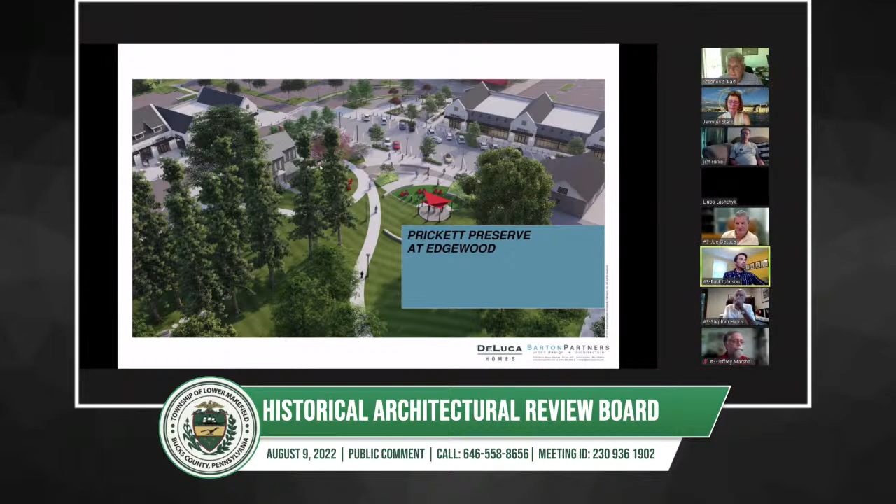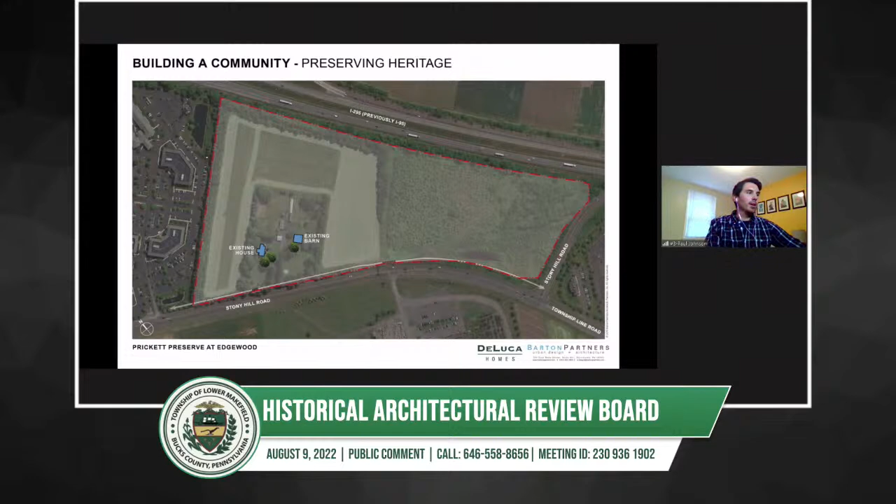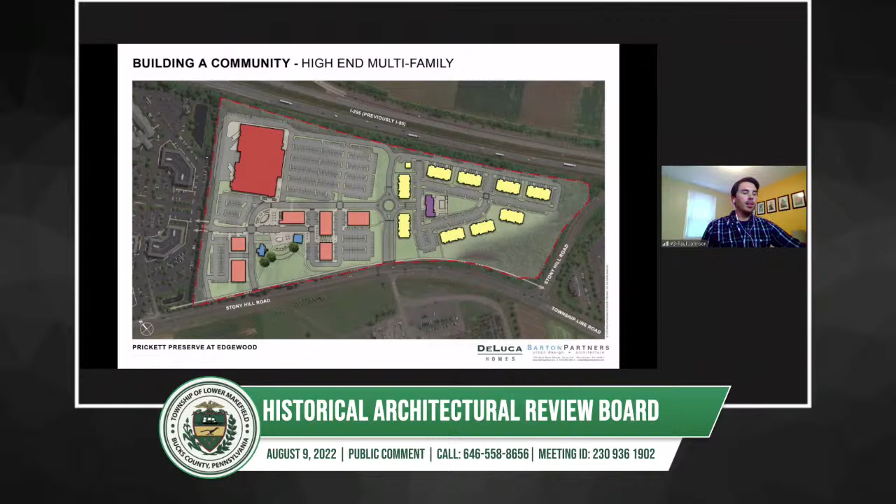This is an overview of the overall site for the Prickett Preserve area, highlighting the existing house and barn locations that will remain as part of the overall land development. The land development plan shows the existing house and barn surrounded by new proposed retail buildings, a grocer to plan north, and to plan east, 200 apartment units in 3-story walk-ups with a clubhouse. This is a rendered view of the complete land development plan.

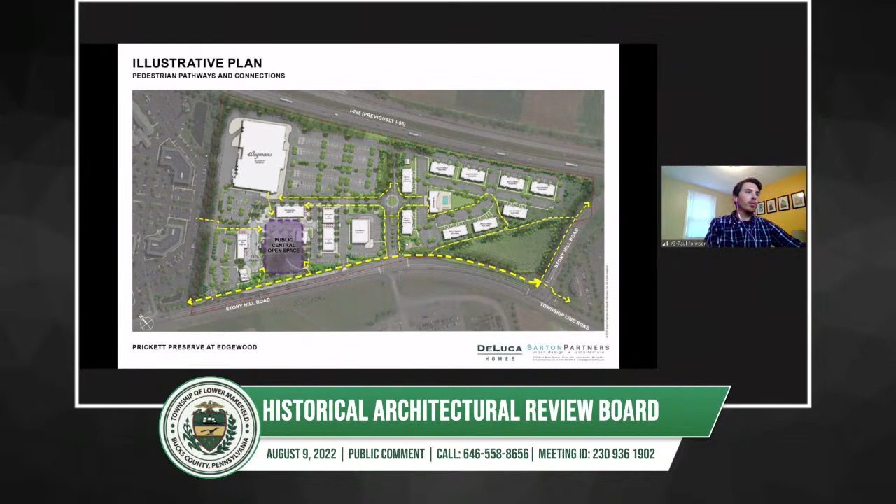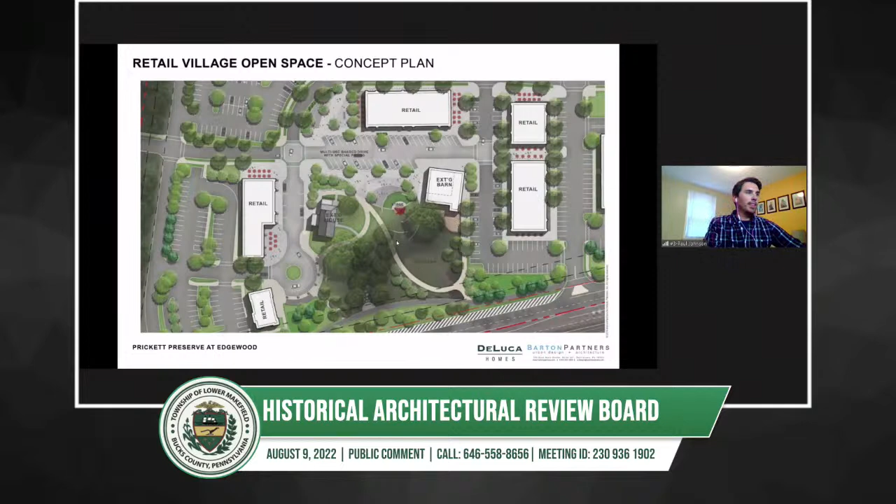Just showing the greenery of the overall site, the goal of the land development plan was to create a central public open space within the area between the existing house and the existing barn that could be used not only for the retail, but for the apartments as part of the overall site. This is a close-up view of that existing barn and house area and the park area that will be created in the space between the two.

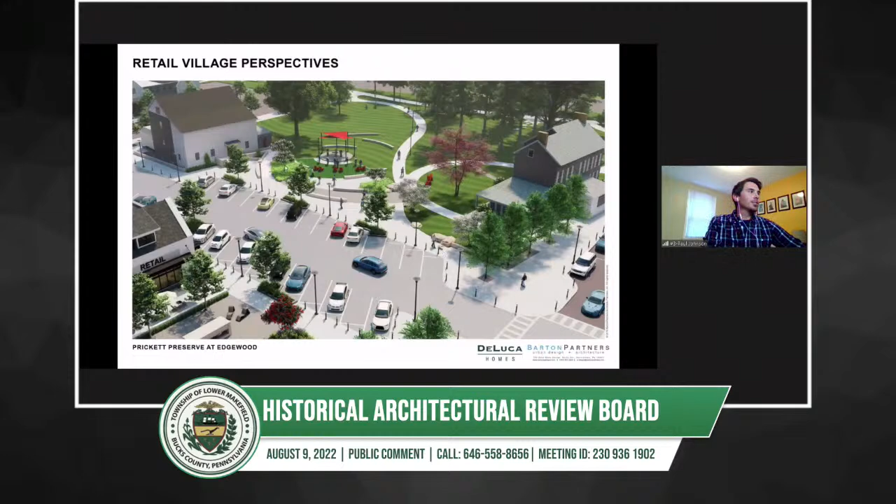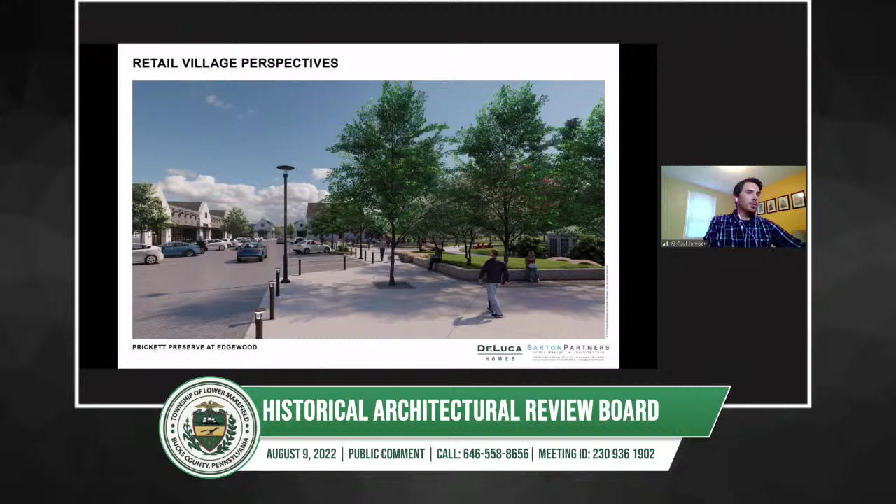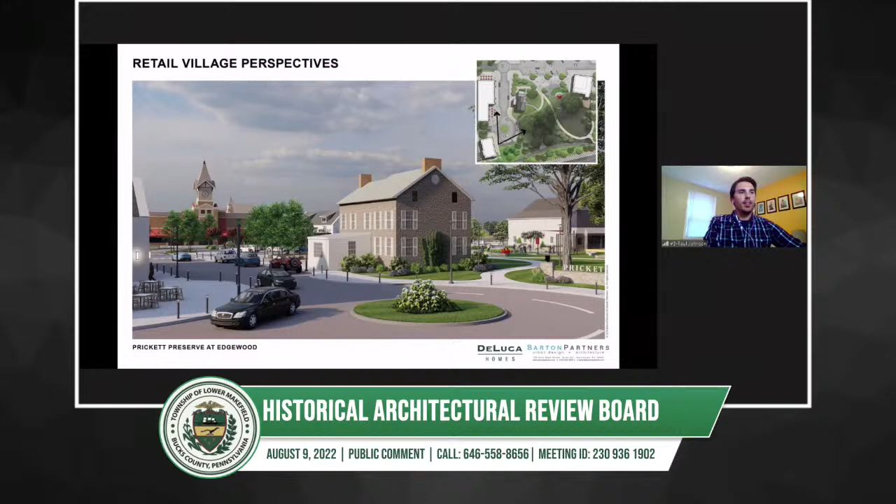This is a 3D view showing the relation of the house and the barn and the park space between the two, with an alternate view from the opposite direction of the barn to the right. This is a more eye-level perspective showing the relationship of the barn toward the back, the house to the right, and the retail to the left. This is a further out view showing the relation of the house looking across the park area to the barn, and another view of that park area.

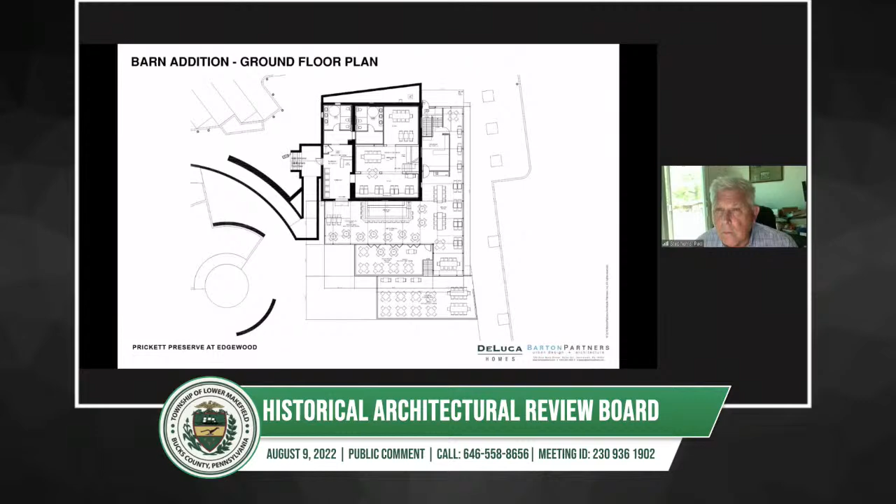For part of the renovation of the barn area, the goal is to add an addition to the existing barn while maintaining the footprint of the existing barn for a future restaurant space. So it's more of a commercial space. The existing barn would be the square area of the plan. The addition would be wrapping the barn to the south and west sides with terraced patios outside of the envelope of the building that connect to the park area.

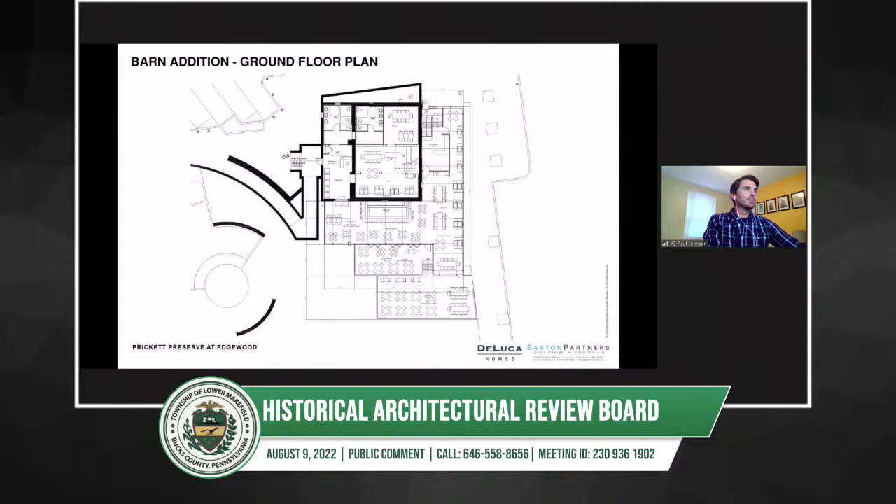There's an existing second floor of the barn that will be maintained as part of the renovation. Now, for the committee, these were the previous images that we had shown just for reference, being our preferred option at the last meeting.

So we took the comments from the last meeting and I'll just kind of run through them. The main focus was really on that corner piece of the original elevation or rendering and how we were handling the relationship of what we'll call a lantern versus the original barn.

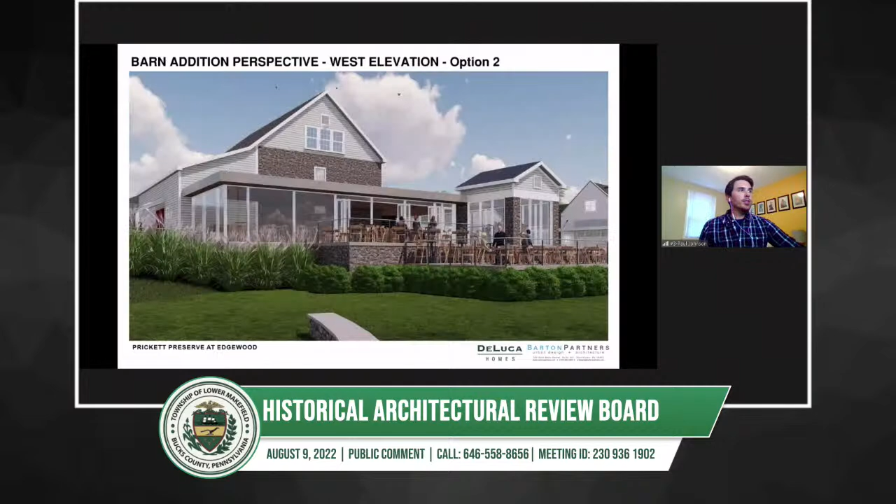So we took the idea of trying to bring in a little bit more of the elements of the barn itself - bringing in that gable face with the windows, bringing in some of the stonework to create more of a storehouse, smokehouse, separate area that ties together to the barn more than it does to the addition.

It still simplifies the idea by keeping it glass to keep that view through the exterior facade, but it makes a connection not just visually by looking through it, but in some of the language of the architecture of the barn.

And this is a more direct view. It shows that relation of the barn gable compared to the addition gable. We decided to keep the roof pitch a little bit lower than the existing barn, just to minimize some of the impact of screening the barn. If we went higher, we felt it would have blocked the view to the barn a little bit more.

We brought the stone into the corners just to anchor the roof line of the building, tying in with a stone that would match the existing barn. So that's just another view from the main drive aisle, what you would see if you were coming into the site via vehicle.

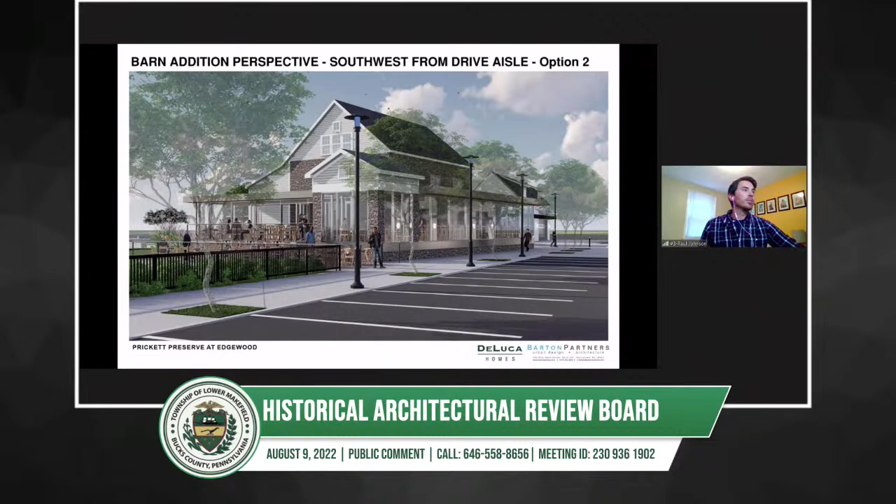This is the alternate perspective showing that southern facing wall with the gable towards the back. There were two additional comments that we touched on from the last meeting.

One was that the original rendering of the ramp area and the stairs to the barn had stone going up to the height of the railing. The comment was that that was really heavy relative to the lightness of the barn. So we scaled down the height of the stone walls to just where the paving would be for the ramps and stairs, then filled in the rest with a matching railing to the patio areas of the barn. So it keeps it more open.

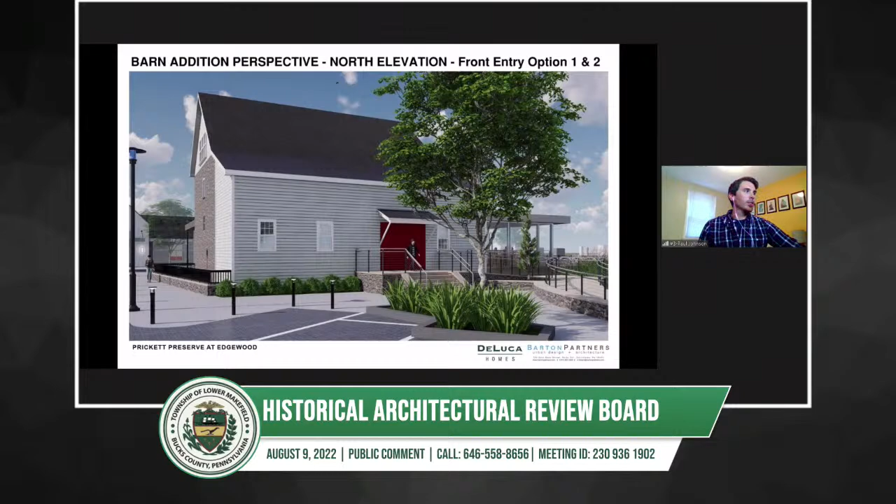Also, the stonework is intended to match the existing stonework of the barn. An additional comment was to address the connection of the barn to the addition in the elevation, since it doesn't really read in this elevation.

So we have an alternate perspective, but just for the committee, the intent of the following slide is to address how this portion of paneling is connecting to the building. One of the recommendations was to create some sort of relief in the corner.

So we recessed an area between the addition and the barn. There is still obviously a tie-in to the barn, but visually it creates more of a break between the two materials by setting it back slightly.

The alternate side of the barn is glazing. So this one is running straight into the barn, but with it being glazing, we felt that there was enough of a break in the connection of the two elements.

Those are the comments from the last meeting, with the main focus being on the lantern, now gable barn area of the corner of the restaurant addition. If the committee has a particular image you'd like me to move to, let me know. I'll flip through and then we can open up the discussion.

Jen, since you ended up with that item about the relief, the setback that you called it, and when you were making that remark at the last meeting, as I'm reading in the minutes, do you have any comment about what they've done so far with the presentation tonight?

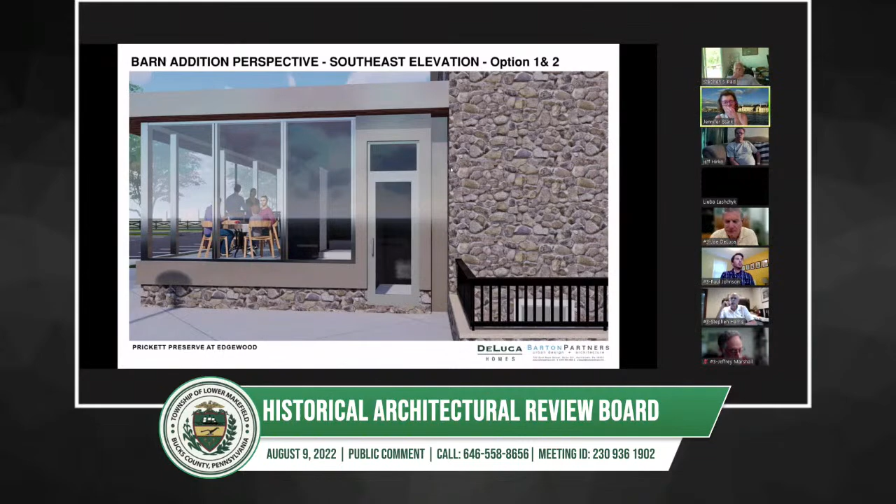That wouldn't be a problem. Do you understand why I'm saying that? It's to create more—let me jump to the other image. You're trying to create a visual break between this corner and that fascia.

Jen, did you see what I sent around? I think my email was delivered to everybody, but since I didn't have the emails from our participants, I figured Jim would send it along. Did you see what I drew along the side of one page I sent? It was an excerpt. I saw your sketch, but I didn't digest it yet. That was for this specific detail described.

It was another way of addressing a break between the roof line and where it hits the barn. Instead of having some kind of flashing detail with the roof line of the flat plane, you break the whole thing back maybe a foot, a foot and a half, or two feet, and have a little glass infill that would allow sunlight to wash down along the face of the barn. From the outside, you'd see the profile of the stone highlighted by a skylight. The skylight would be the point of connection tying into the flat plane of the roof. The idea would also be to provide some linear light fixture to shine up at night and create a wash on the upper part of the barn. So that was another alternative to tie in with your idea of breaking it loose and making it a bit more of a standalone.

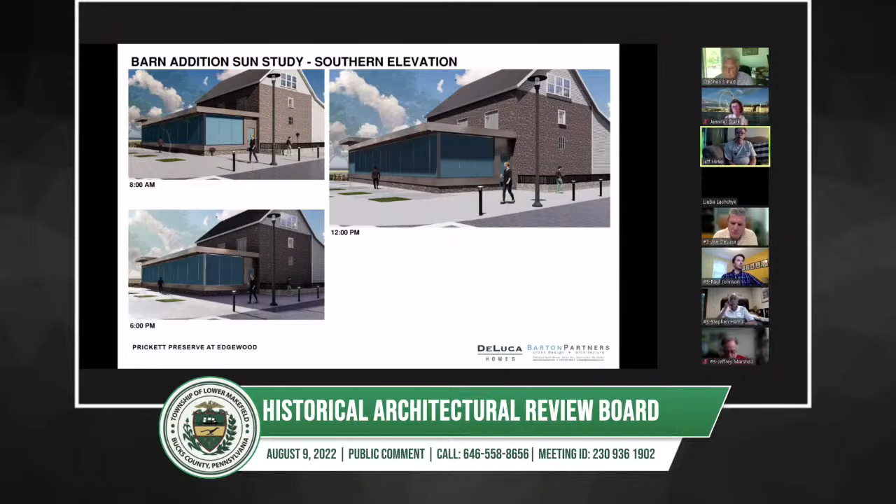I do agree with your idea about having that continuous break or glass along the barn roof that can allow light to wash in and up along the front of the barn. And I do agree with Jennifer, how she was saying to set back that fascia on that roof so everything lines up there alongside the door where it meets the barn. That would just be more cohesive with everything going together there.

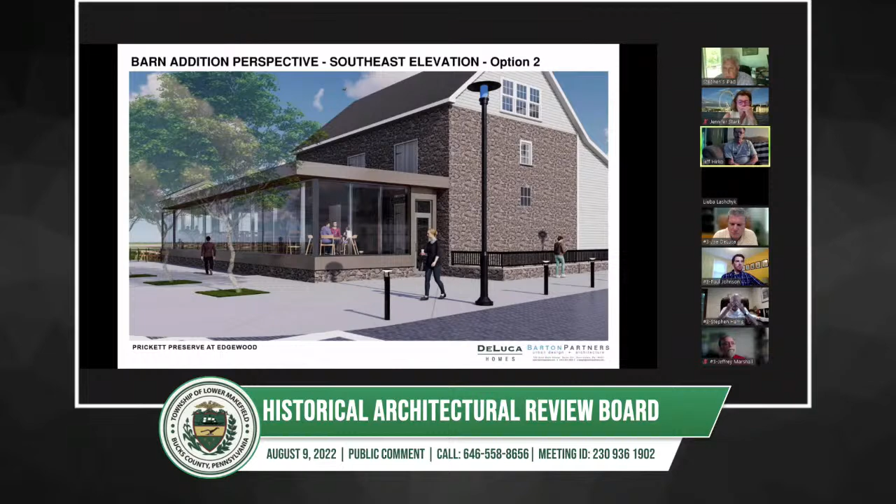The other concern I have - I'm the one that brought up about what you're calling the lantern and trying to get it to look kind of like a smokehouse. To me, looking at that drawing, and don't take offense by this, but it almost looks like a giant aquarium that you'd go into a Chinese restaurant and see inside with these giant goldfish in it. That to me just looks like it's stuck there and it's out of place.

Like I said, don't take offense to that, that's just my impression of that, that's what I'm getting from that. I don't see how that works into the plan at all. The roof line's not the same. I just don't see how that works into the whole scheme. It actually, I think, worked in better before than it does now.

But so then option one would be the preferred option. Well, I was wondering if I might talk to my technical team. Are they still on? Erica?

Perhaps Jennifer, that email that I sent out had a couple of attachments, and I think one of them was a kind of photoshopped redo of that brick cornered enclosure. Is it something that you can get up onto your shared screen? Let me try. Thank you.

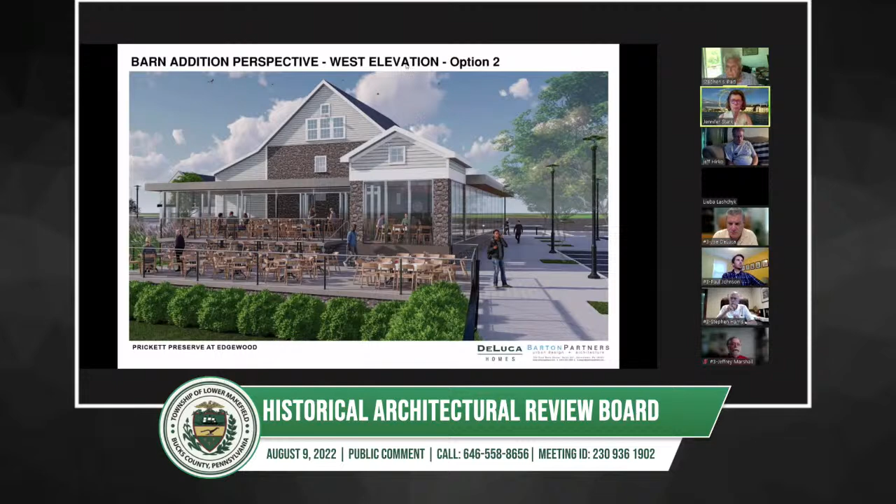But my thought was that if that could be something more substantial and not glazed in between stone columns, but actually just a stone veneer enclosure that might allow for more intimate dining that's not out in the public eye, maybe enough for 4 or 5 tables. So bigger than what you have there now, but small enough where it reads as a separate building.

And instead of having a peaked roof, I put a shed roof on it, or at least I'd consider that you consider a shed roof, because in terms of that, I got a red line showing the shed roof idea. It provides a lower profile that could act as a clerestory kind of connection there, and the rest of it would be a little more solid.

But the idea is that if it's a shed roof, then the stone can go all the way up to the underside of the roof, and it doesn't have to use the clapboard. And I guess of all the parts of the barn that are there now, the clapboard is the most objectionable to me, as a later addition - it speaks more of the simplicity and utility type of installation that might have happened with the barn.

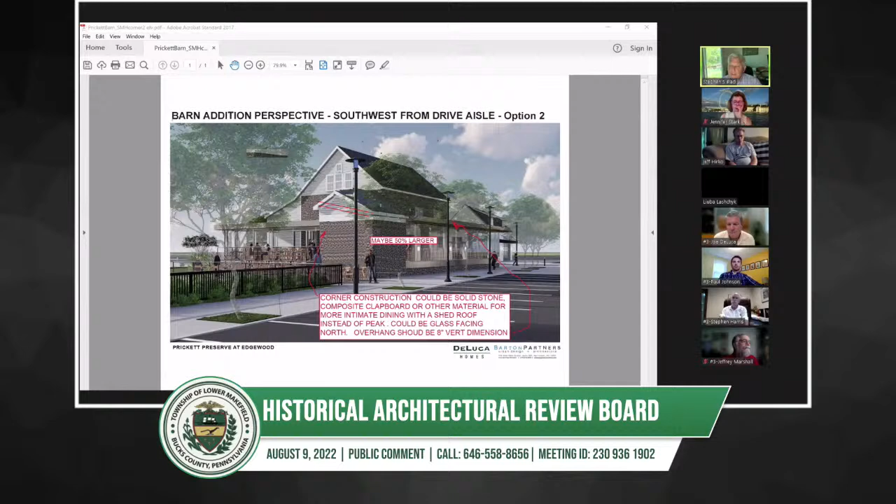The whole idea of making this so we can have the right kind of drainage and do the parking the way we want it is kind of beyond our pay grade here. We're trying to address the issue of maintaining the look of a barn that has been deemed historic, and we're trying to do that in a way that allows for public appreciation of it. I guess those are the reasons I'm making the suggestions now, because at this point there seem to be so many concerns taken care of by, let's call it, adaptation of an existing plan.

I'm seeing this as we're struggling, and this should be something I'm asking you as the architect, as a designer, to tell me what it is about what you are doing that's enhancing, that's highlighting and calling into very strong visibility the actual value of the barn as a historic treasure we are trying to maintain. It shouldn't be, well, we're trying to minimize the impact. It should be, what are we doing to maximize the look of that barn? And I'm not seeing that happening right now.

But Steve, do you want to take this, or do you want me to just give Steve a little bit of it?

I think the barn really hasn't been seen by anybody for how many years, with all the trees and everything that have surrounded that property. So I think we're doing a lot to preserve the barn and pay homage to its roots. As Paul was talking about, the connectivity between the house and the barn, having the open space there, a lot of thought was given to make this barn the gem.

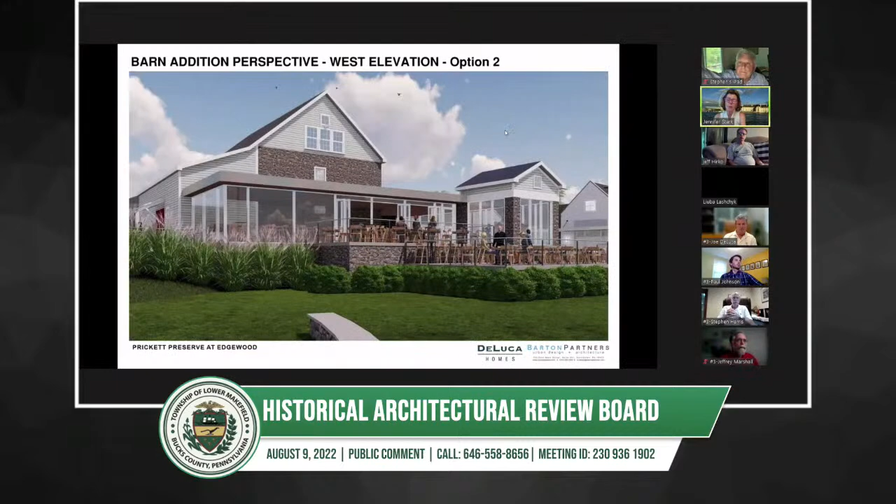I voted for glass. I liked the first image better than option 2, definitely. But it's the form - if it's a shed roof, it's a flat roof. I wanted a contemporary abutment to the barn. I don't think that's successful material wise. Maybe it is form wise. Think of the Benjamin Franklin house down in Philadelphia that's just a frame.

Again, the thought is, we've had internal conversations, and Paul put that up, and we said let's show an alternative which we think goes down the path we were led to believe. I believe Paul and others would say this is the one they prefer to begin with. They've gone through the exercise of showing other options, and they're not coming up with something successful that meets everybody's goals. So going back to the original concept is good and bad, because that's what they came up with given the parameters they were working under. It's good to know that we've all gone through an analysis and see that perhaps that was the best option.

Steve, you're muted.

Let me ask for a consensus to kind of resolve this. Looks to me like a 2-2 decision in a way, but I don't know. I'd like to see you investigate a little further, along the lines of what I put up there as a potential.

I'll be happy to send that to whoever should receive it, so you can look at it at your leisure. It's now part of the record. It probably should also be included as part of the minutes, and we'll have to figure out how to do that.

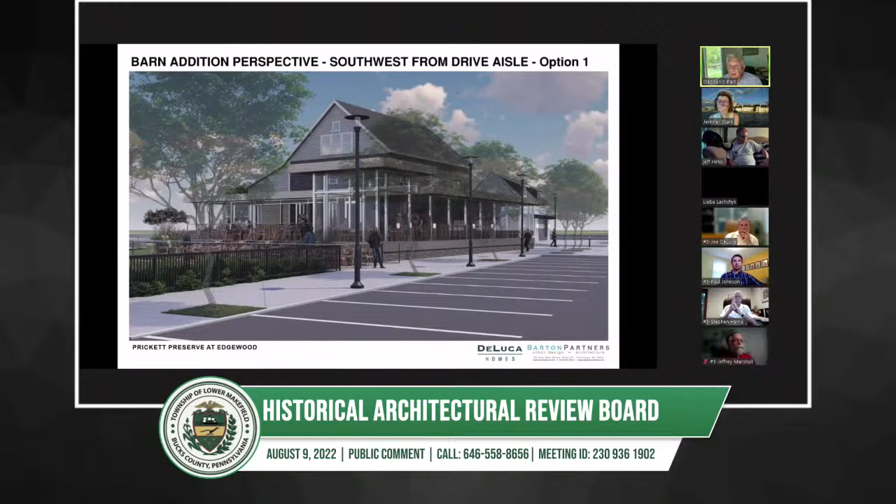All right, can I ask if there are any people connected with us online, Erica? Yes, we have one person online for public comment. Helen, I'll bring her in right now. Helen's in the room with us now.

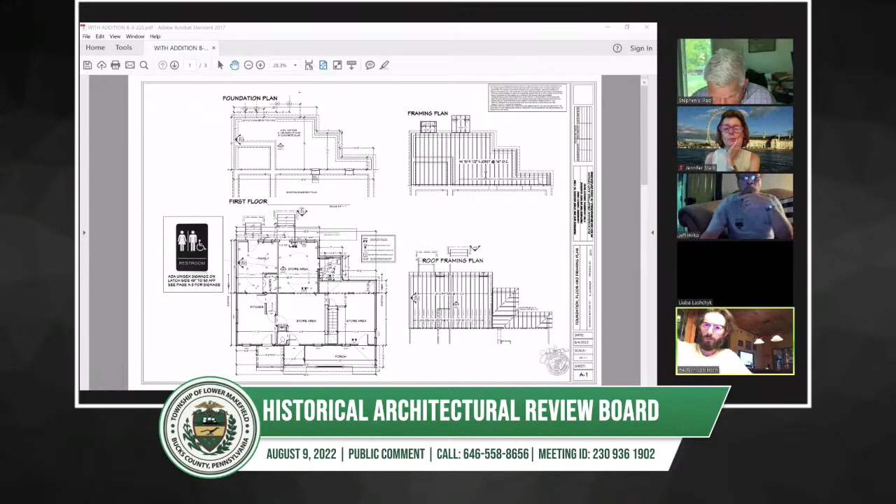I just shared my screen with the plans. There, yeah, there it is. Yeah, thank you. So there's a number of sheds that are attached to the house. This is just one more of the traditional way of handling additions up against a higher than usual center section.

So materials, roofing, do you have anything further to add with your proposal here? The roofing will be matched. The siding will be matched. The roofing says EPDM rubber roofing.

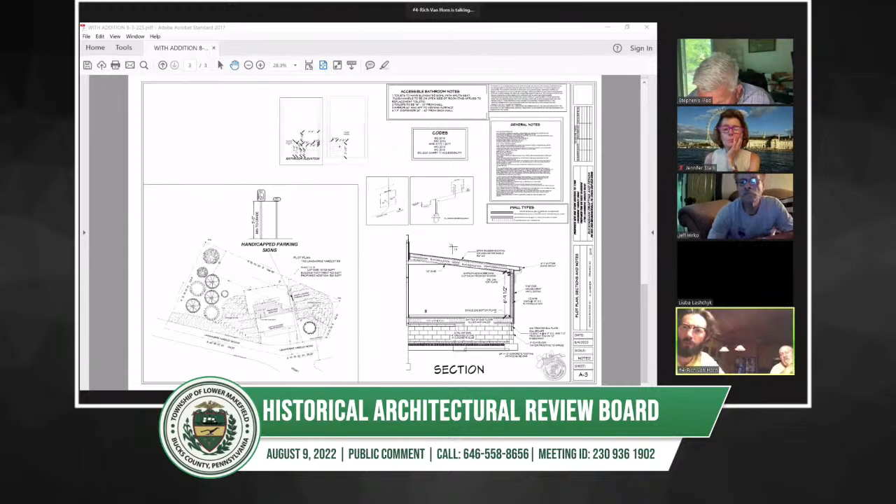Yeah, I guess he's not using shingles. Yeah, he's using rubber now. That's maybe. Nobody said it was underneath the shingles. I don't think so. That can be changed if the pitch allows it. It should show.

Chad told me it's matching shingles. Yeah, it's not showing matching shingles. Not on the addition. Yeah, I'm sorry if that's not corrected right on there, but yeah, that was the plan, to use the same shingles that were approved on the main part of the building.

Well, if we have a 1.5 in 12 pitch, those shingles won't be authorized by your shingle company, nor any kind of warranty would be available on that kind of installation. Yeah, I think that's why you had to change it.

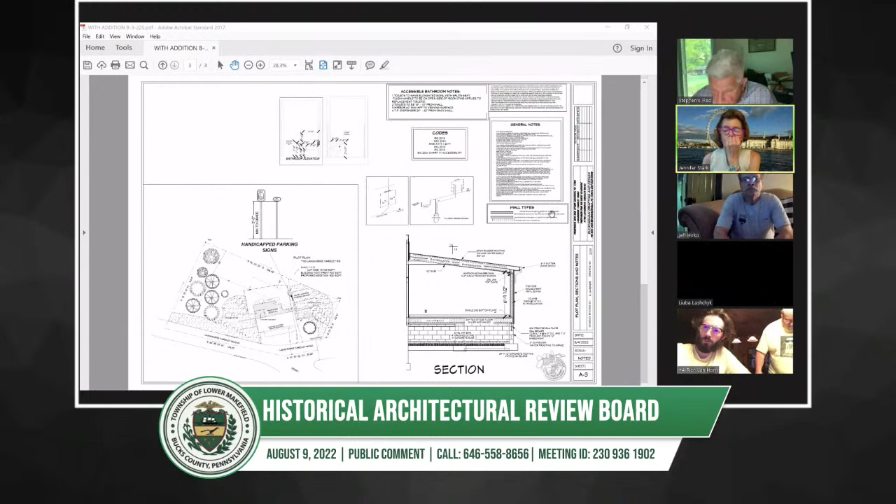So you're saying that that roof that they propose to use is not going to be accepted? No. Since it's in the back and it's not going to be visible from the street, I'm sure we give some consideration to the fact that we are trying to make the whole system work better. And I'm not saying that the members won't vote, as this is a reasonable resolution to the addition back there.

The fact is that many of those kinds of additions that were installed, many of them had black rubber roof or black bituminous roofing, roll roofing, and that was the standard way of handling it. And I don't think it's without precedent, and it certainly is in keeping with the historic nature of the village, at least from my point of view. I'd like to hear what the other members have to say.

So all the other old houses with the roll roof, you're saying it's not keeping up, but there's many houses with roll roofs, with shed roofs. So I'm saying that that's a positive thing, the fact that there's so many other instances.

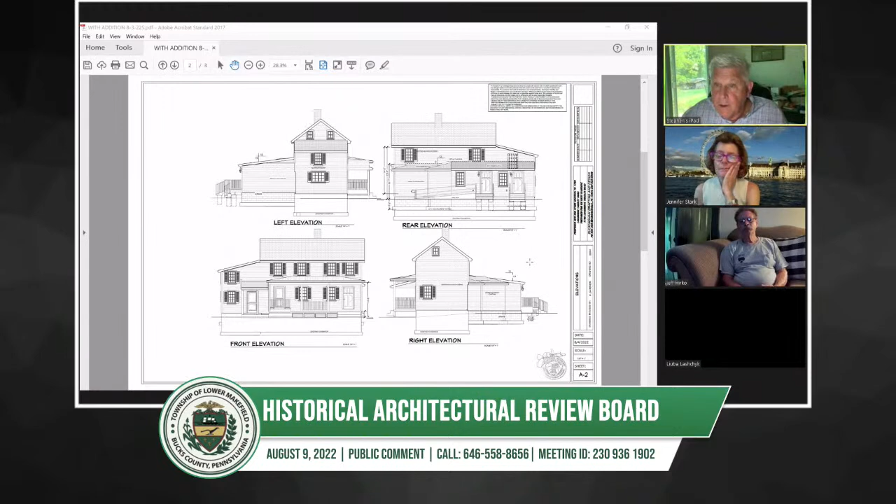So, Erica, our last presenter. They're joining us now. Thank you. So good evening. Good evening. We're glad to have you and to see the progress you're moving along with the plans. If you could identify yourself.

I'm Joel Petty. We're presenting for Milestone Behavioral Health, the renovations to the barn that we proposed at the last meeting, with mostly some note changes and some investigation on whether we could salvage enough siding for the front renovation to maintain that as the existing siding, which we are, it looks like, more than able to do.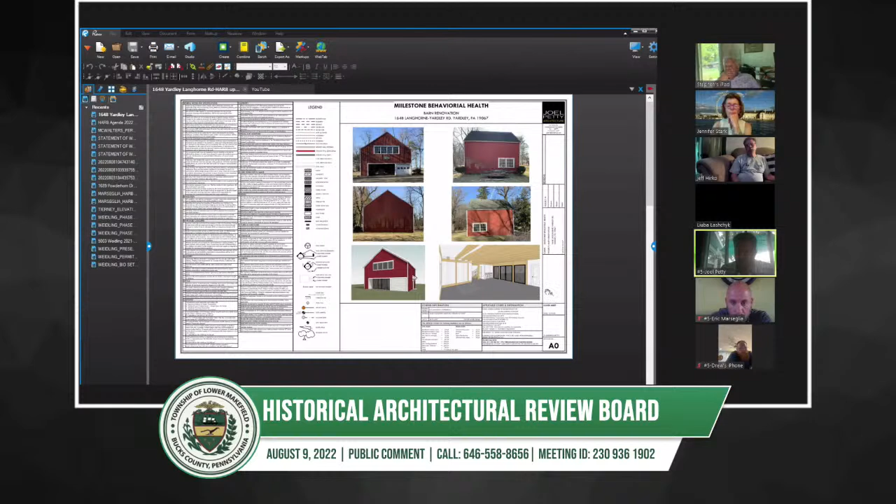So the approach at this moment is to keep the front facade as renovated with the original siding refurbished, and switch to HardiePlank board and batten on the other three sides past the front corner boards. Most of the rest of the presentation we're proposing is going to remain as proposed at the last meeting, with just a little more development around the bay arrangement of the existing building, and the front recess, maintaining that void that is there now with basically just an open barn face, trying to keep the idea of that shadow line, replacing the existing weathered garage door on the service bay side of that barn, which is now our service bay side of the building. It's going to be where the circulation and bathroom utility areas happen, keeping that main space there open as office area, but infilling that void with the entry system that maintains the shadow line of the face of that existing aesthetic.

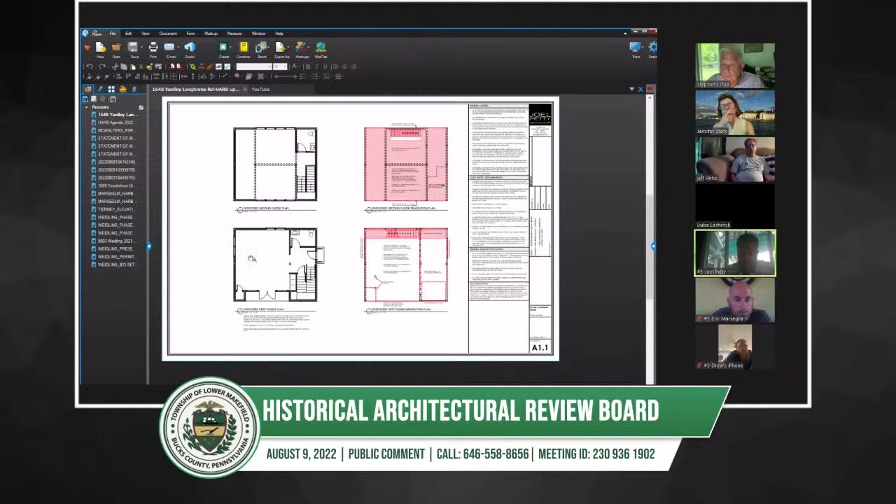And then we're able to replace the windows with new true divided light windows, adding those to the rear of the building as well. But basically that front facade is going to maintain the look of the existing structure. So that's how we're noting this at the moment, keeping that recess shadow with the infill of the black storefront. Most of that is what was presented at the last meeting.

Thank you. Any comments from our board members? I think they're moving all in the right direction.

Jen, anything? I have no comments. This is exactly what I would like to see, how this barn moves into the 21st century. Luba? Yeah, looking good, looking great. Thank you.

I'd certainly like to commend you on your response. Your working with us has been exceptionally seamless, and the advice, I think, has been utilized for the purposes that we hope make elegant sense and utility as well. I thank you for bringing this before us.

If we could, if we haven't, I thought we had voted for a recommendation of a certificate of appropriateness. We did? Do you not recall? No, we did not. We were hoping to do that, yes. Okay, so I'll entertain a motion.

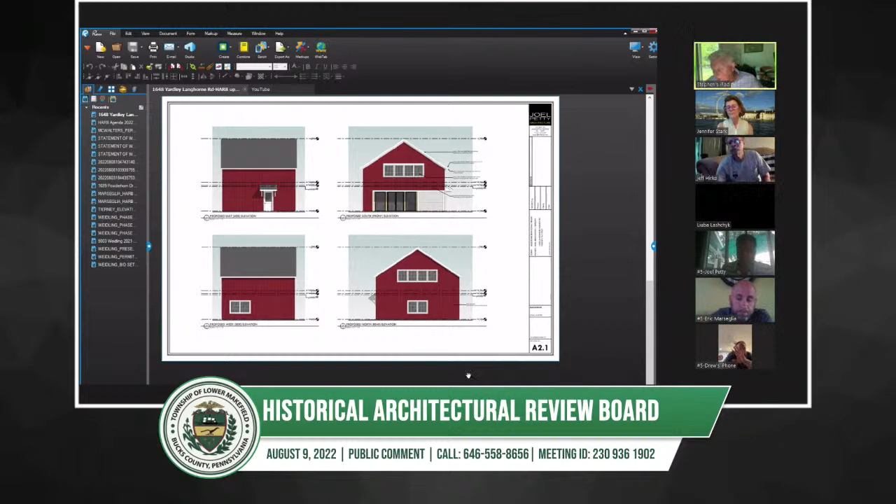So again, I'll ask for a motion to table discussion of further, because it's already 7:30. We were going to talk again, if we had time, about the report to Patterson Farm, and I don't think we have really a good time to do that tonight. So a motion to table.